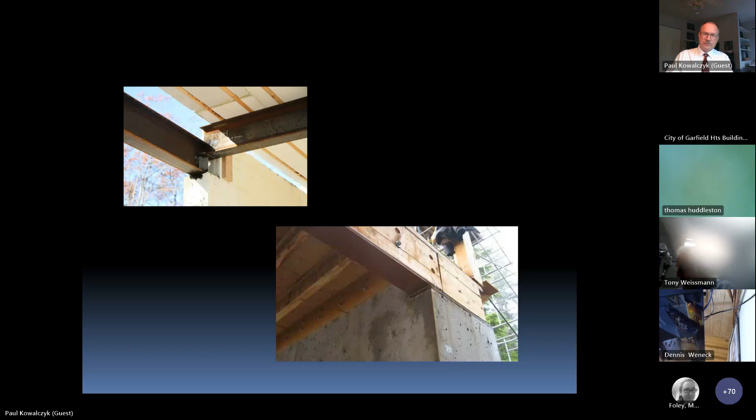What this new code section said is, a lot of times as we're putting up the foundation walls and we start to set the steel beams that are resting on those foundation walls, anytime you run into an open corner where that beam sits in that open beam pocket, starting in 2018, that beam now had to be physically attached to the wall, like we see here.

Now, what actually led to that code change was that there was a house in Ohio under construction, with a beam sitting in an open pocket, and I believe it had a walkout basement. The first floor deck was up. They were starting to put the walls up, but a contractor drove the Bobcat into the walkout basement with his bucket lifted up, and as he was driving through, the bucket caught onto one of the steel beams. Because it was sitting on an outside corner in an open beam pocket and was not secured to the foundation wall, that pulled the whole floor structure down, and all the walls that were starting to be erected fell down as well.

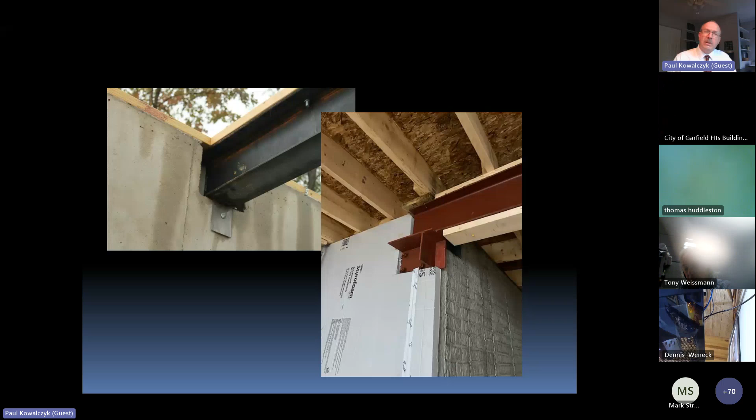And so the whole reason behind this is, as that building is going up, we still want to make sure that it's a safe environment. And that's why this code change came to be. And so when the architect, the structural engineer, and the contractor asked me why this code change was there, I was able to explain to them, this is why we're doing it. It's not just because somebody wanted this code change, but there was really a reason behind why it came into play.

What I've done in this presentation is stayed with a chronological order. This course could never cover all the tragedies and events that have occurred throughout the world.

Let's talk a little bit about the first building code that we know of. It was actually the Code of Hammurabi of 1760 BC. And under this code, there are 282 laws. And of those 282 laws, 6 of those laws related strictly to building construction. And those dealt with consequences of the building failure rather than safe building.

And if you're reading the legal aspects of code enforcement, they do discuss this code as being one of the firsts. And there was some understanding that you, as the builder, had a responsibility if you were building a structure that people went into. And this one specific law stated that if a builder builds a house for somebody and does not construct it properly, and that house which he built falls and kills its owner, then the builder shall be put to death.

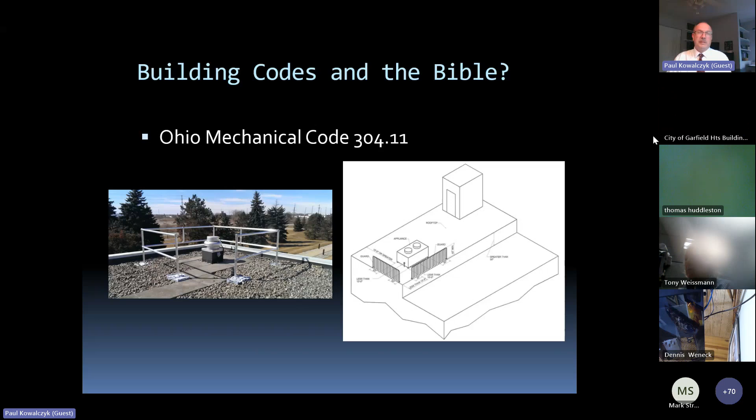The Greek philosopher Socrates, one of his quotes was he had stated that he shall set the joints against each other, fitting, and before inserting the dowels, he shall show the architect all the stones to be fitted, and shall set them true and sound and dowel them with iron dowels, 2 to each stone. And when you read that, that sounds to me like the inspection process. Before we put it all together, before we grout everything, before we close everything up, make sure the architect comes out and looks at everything.

And similar today, in our administrative section of the building code, it is the duty of the owner or the owner's representative to cause the work to remain accessible and exposed for inspection purposes. So going back to Socrates, this section goes all the way back to that. So well before the 3 little pigs understood the meaning of a strong house, there is evidence that the erection of safe structures was an idea going back thousands of years.

So let's look back in history on some of the early tragedies that shaped the need for some building codes. We've already discussed the code of Hammurabi and the Bible, but one of the earliest events that shaped the built city was the Great Fire of Rome. This occurred in July of 64 AD, and over 70% of the city was destroyed. Rome burned for 6 days and 7 nights, and some say that Emperor Nero had actually started this fire as a means for greater urban renewal.

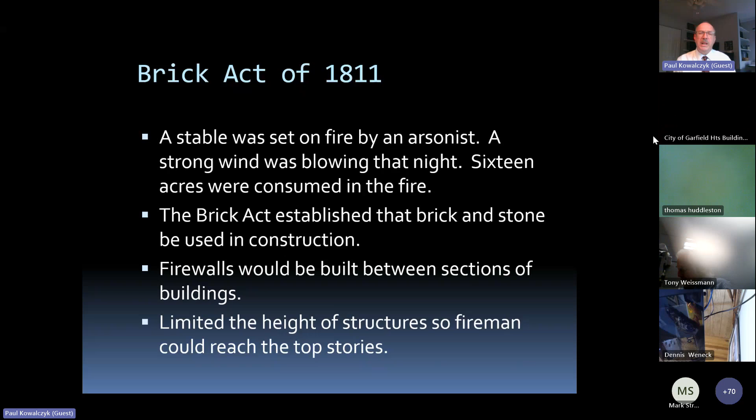The Brick Act established that brick and stone be used in construction. If you were having two houses or two structures built next to one another, you needed to construct a firewall. And they also started limiting the height of structures so that if there was a fire, the firemen would be able to reach the top story of these structures.

Similar to the previous act, in 1814, Portsmouth, New Hampshire also enacted their Brick Act because their city had three major fires in 1802, 1806, and 1813. This Brick Act created a fire zone which would allow wooden structures to be built, but they were limited in size and limited to only being constructed in one story.

There was a lot of outcry when this went into effect because this was a town that was built on the water, and most of the carpenters in this town were shipbuilders. And typically a shipbuilder is somebody who works with wood. And the last thing you want to force a carpenter to do is tell him that he can't build his house out of wood, that he needs to build it out of brick or masonry. And so again, there was much outcry against this act.

In that same year, we had the burning of Washington, D.C., where the British burned down many structures in the city as an attack in the War of 1812. Numerous public buildings were damaged by the fire, including the White House and the Capitol building.

So cities are beginning to realize that there are issues when constructing with wooden structures. As we have these fires, when the communities start to rebuild, we look at widening the streets, putting restrictions on wood. Masonry becomes a means to provide separation between structures. And we really are starting to see cities develop restrictions around buildings constructed with wood.

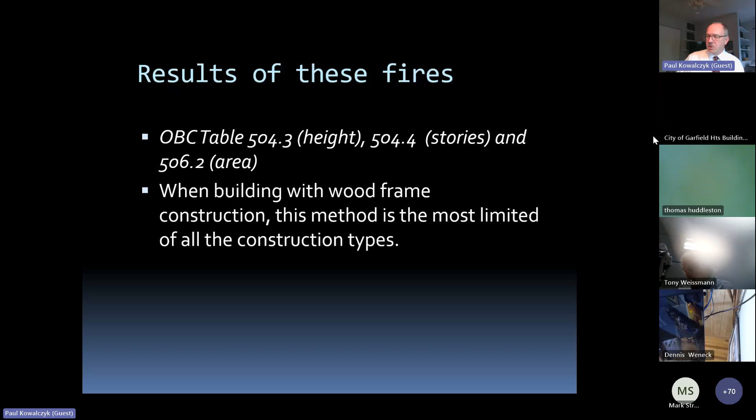So if you jump all the way up to today, what you see as a result of wooden structures is that when you go into our height and area tables, the number of stories, how tall you can build a building, how large you can build a building, you will find out that when building with wood construction, this is the most limited of all the construction types.

And so when you look at these charts, it makes sense that based on our history, when a wood structure is under fire, it will collapse pretty rapidly. And because of that, we don't want to build these buildings too tall or too big or multiple stories.

What is interesting, though, is, as I said earlier, today, on Friday, we went into the new code cycle, the 2024 Ohio Building Code. And we used to have a type 4 construction, which was called our heavy timber. Those were the old buildings that were basically built with brick exterior walls, and all the interiors were heavy wood timber structures. We now have a type 4 A, B, and C construction, because what we're seeing now is what's called a mass timber building.

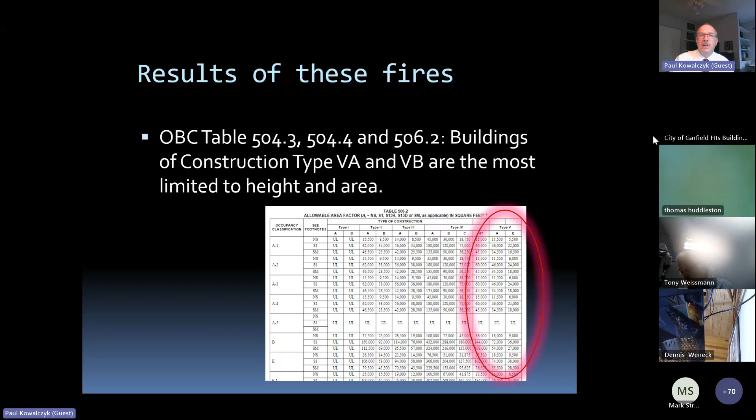And these are structural members made out of pre-engineered wood, and we're putting them together just like we put steel structures. So what we're finding is, although it's a wooden structure, it is pre-engineered and they're much stronger. And so when you build out of those wooden structures, you can actually go quite tall. But again, if we're just stick building a structure, we limit those just because of what we've seen in the past.

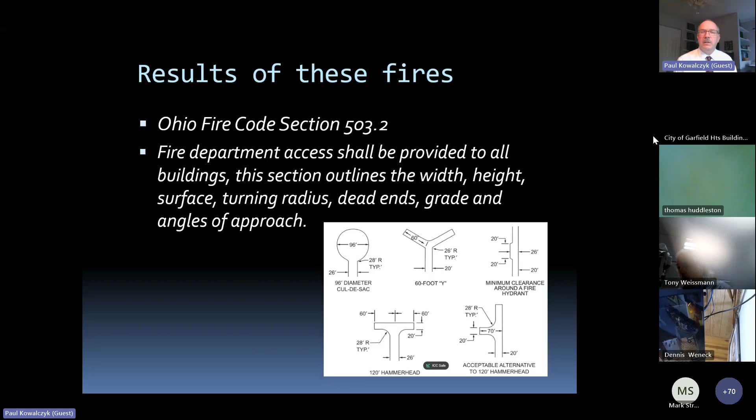Also, as a result of this, if you look in the fire code section, we want to make sure that if a structure does have a fire, that the fire department can readily access these structures. So even in the fire code, we look at roads. If we have a road that comes to a dead end, we have to put means in place that we can get safety vehicles to the end of that road, but we can also get them back out of that road. And so again, we're trying to make provisions so that should there be a fire, we can get vehicles safely there.

Fire separation: there's nothing wrong with building buildings up to a property line, but the closer we get to a property line, we want to make sure that if there's a fire in the building that we've built and it's right on the property line, that fire doesn't hop over that property line and catch another building on fire. And so what we've done is that as we get closer to the property line, we have to really increase the fire resistance rating on that exterior wall.

We also have to begin to look at openings in that exterior wall as we get closer to a property line. In this example right here, maybe that's a 2-story building and it has a roof, but the building next to it is much taller, and those buildings become close to the property line. What we have to think about is if that smaller building catches on fire and that fire penetrates that roof, there's a good chance that that fire could move over to the building next door.

And so we have to start looking at, if we are going to put openings in that building next door, we have to do protected openings, limited in size and where they could be located. So what we are trying to do is minimize any type of risk should there be a fire. And again, this all goes back to all these earlier tragedies that we saw relating to conflagration.

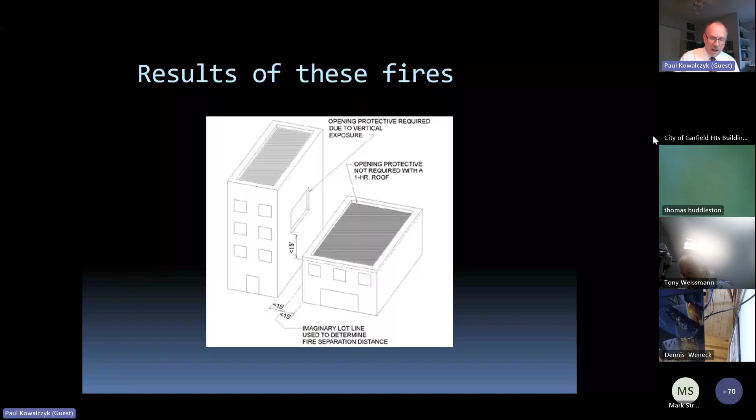Today, if we are putting 2 structures up against one another, fire walls have to be built of any non-combustible material. So in most cases, when we're building buildings, a lot of what we see is masonry being used as a firewall. But in a lot of our townhomes, we do have non-combustible material, and that's basically a shaft wall assembly

that's put between those units. So again, we want to make sure that, yes, you can put buildings up against one another, but we want to protect them so that should there be a fire on one side, the building on the other side can remain.

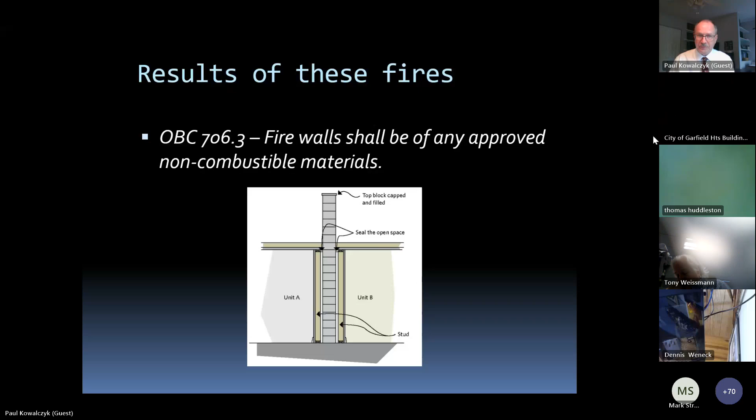Now we're going to shift a little from construction and go into these next examples that will deal with the interior environment of the structures that we live in. And we'll find these in Chapter 12 of the Ohio Building Code and Chapter 3 of the Residential Code of Ohio.

In the late 1800s, many buildings were constructed in New York City to house multiple working class families. We saw a large population of working immigrants coming here to the United States, and we needed to house those. You had a lot of private landowners who were starting to build what's known as tenement housing for these working class folks that were coming into America.

These buildings were known as tenements and are known as some of the worst housing that was ever built in our history. These buildings lacked the basic need for light, ventilation, and sanitation. And I'm sure if you Google it, these pictures, these were structures that people actually lived in. But we really had no regulations up until this time.

So private landowners really maximized what they could build on their properties. And there were really no laws out there that told them how they had to build these structures. And so in 1867, the city of New York came up with the first Tenement Housing Act.

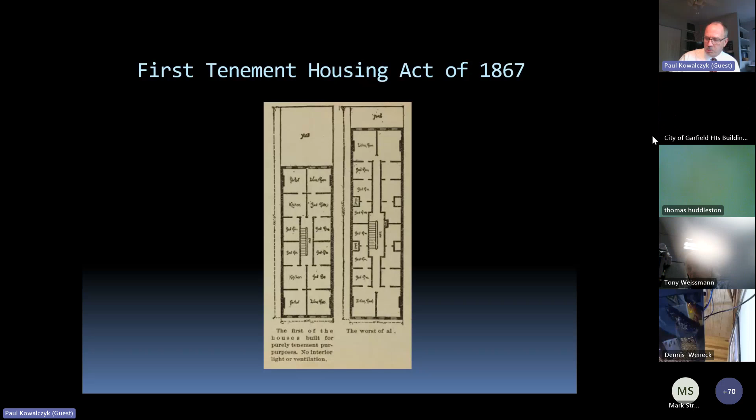So this Tenement Act required that, one, they were going to start installing fire escapes on every building so that should there be a tragedy, there was a way to get out, not just from inside the building. Every single sleeping room had to have a window. Up until this time, there was no requirement to have any railings on the stairwells.

And because we didn't have indoor plumbing, for every 20 people that lived in your structure, you had to provide one outhouse. And again, more pictures. If you look at these pictures, you have your outdoor outhouses for these buildings. And on the inside, there wasn't much ventilation. A lot of these interior rooms were dark because they had no access to natural light.

Well, they went through that first iteration with the first Tenement Housing Act, and they found out that it really wasn't complete enough, because now they just felt that, okay, we're giving buildings the means to have windows. So everyone just kind of pushed their bedrooms to the front and rear of the house, but all interior rooms needed to have windows, and all windows needed to face a source of fresh air and light.

And so what the designers came up with is what we know as the dumbbell design. But it was found shortly after they started building these dumbbell designs that it really only benefited those people who were living on the top floor. And so as you look at this plan, these are two units stacked next to one another. But if you just look at one of the units, the floor plan does look like a dumbbell.

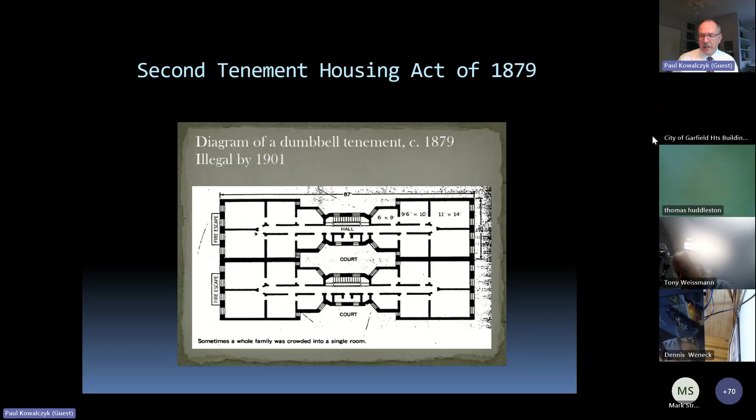But could you imagine looking at this building, the taller you get with that building, those people living on the first couple floors, even though they were facing an interior courtyard, those courtyards were so small that there was really no light getting to any of those units. Maybe the top 2 or 3 floors had some light, and maybe you were getting some circulation.

But what they were also finding out is a lot of these courtyards were used where people were throwing their trash down. So the people on the lower floors ended up just closing off those windows.

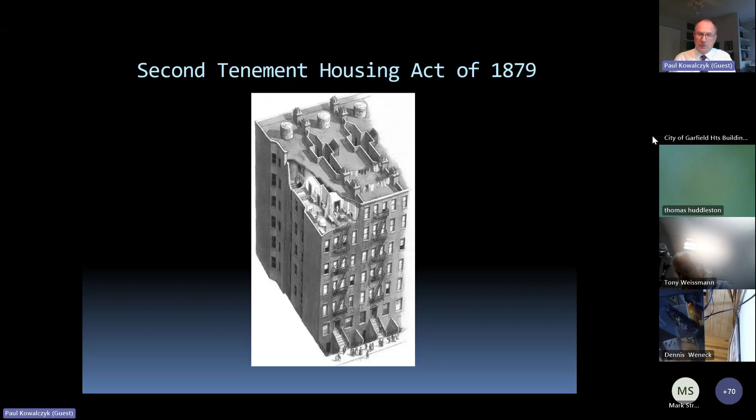And if you look at this picture, actually looking down one of these shafts, you can see that it doesn't take much going down too far until it becomes pretty dark. So really, this dumbbell design really did not work. You weren't really getting the required light or ventilation of fresh air into these rooms.

So in 1901, they actually came out with a new Tenement House Act, and it actually banned the dumbbell design. And now they started looking at floor plans that either resemble the letter H, C, I, or L. Many of these buildings started to be constructed on corner lots so you could take advantage of the two street frontages. And this was just another example of how they really started looking at increasing the interior courtyards and making them much bigger so that you truly could get light and fresh air down to the lower floors.

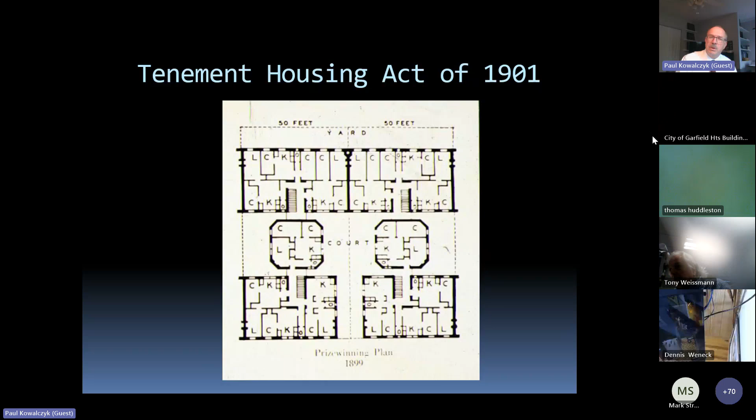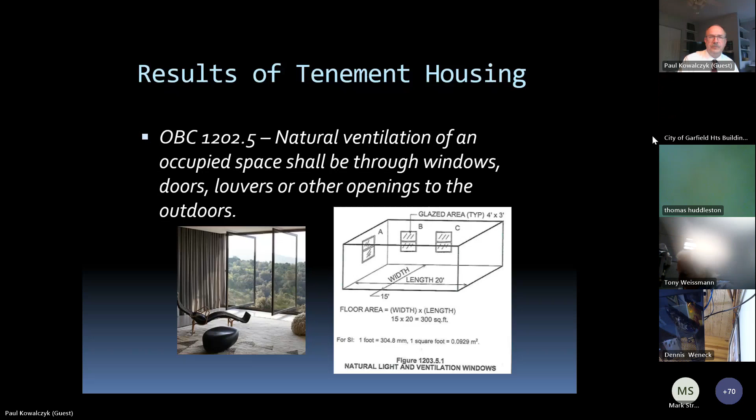So looking at all this, when we go into chapter 12 of the Ohio Building Code and chapter 3 of the Residential Code of Ohio, we can see now that in any type of occupied space in a building, we need to provide a means for natural ventilation through windows, doors, louvers, or other openings to the outdoors. And then every space intended for human occupancy shall be provided with natural light by means of exterior glazed openings. So we have recognized that natural light and ventilation is very important to provide a good interior environment for human habitation.

We talked about those courts between buildings. Early on, those courts were really small, and they recognized over time that those courts had to increase in size. And so in today's code, it actually states that courts shall be not less than 3 feet in width, and courts having windows on opposite sides shall not be less than 6 feet in width. Courts shall not be less than 10 feet in length unless bounded on one end by a public way or yard. And for buildings more than 2 stories above grade, that court shall be increased 1 foot in width and 2 feet in length for each additional story.

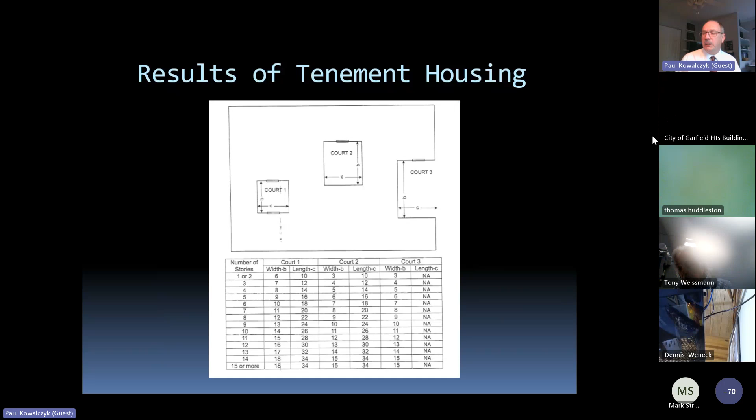So what this code section is saying is that, yes, we can make the building taller, but as that building gets taller, our courts are going to get much bigger and wider so that we can actually get that light and air circulation down to the lower floors.

So the results of a lot of the things that came out of the tenement housing deals with, in chapter 12, we have ventilation of our spaces for occupancy. There needs to be temperature control to provide heat within these buildings. You need to have lighting. We have restrictions about yards and courts. We want to make sure that there's sound transmission control, so we're not carrying heavy sounds between units. That all rooms have minimum space size requirements, and that all our facilities that we live in have toilet and bathroom requirements. And again, this is chapter 12 of the Ohio Building Code, but all these same issues are covered in chapter 3 of the Residential Code of Ohio.

So now we're going to go to the Chicago fire of 1871, which was October of that year. And there were over 300 fatalities. Over 17,000 buildings were destroyed, and this fire covered a 3.5 square mile area. As a result of this fire, over 100,000 people were left homeless, and $200 million in damage, which would be worth $4 billion today.

There always was the legend of Mrs. O'Leary's cow knocking over the lantern and causing this fire. But again, Chicago at this time was a congested city of wooden structures. At this time, we had months without rain, and there was actually a major fire elsewhere in the city the night before. Now, actually, between October 8th and the 10th, there were wildfires raging throughout the upper Midwest region, including Illinois, Wisconsin, Michigan, and these wildfires swept throughout this region.

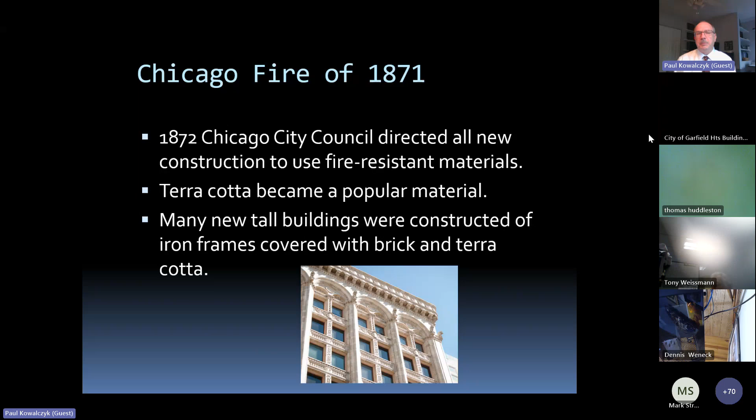And as these buildings were starting to rise into Chicago, as we started to see the early goings of skyscrapers, we started requiring fire hoses to be put into these larger buildings. In 1872, the Chicago City Council directed all new construction to use fire resistance material, and terracotta became a very popular material. As we were building these buildings much taller that were constructed out of iron and steel, in order to protect that under a fire event, we needed to cover those with brick and terracotta.

So what we can relate to in today's code, going back to that time, is if we go in chapter 7 of the Ohio Building Code, based on the structure of that building, we have to make sure that we can protect that structure under a fire event. And so whether it's a wood structure or a steel structure, how can we protect that in a fire situation? In section 905, we talk about standpipes. We have to be able to get that water up to the top of a building. And so certain criteria requires us to have standpipes going up through stairwells.

In chapter 10, the number of exits, we have to make sure there are plenty of exits to get people out of the buildings and have a certain amount of access to doorways. And then also exit travel distance. We can only go so far in order to get to an exit. And we also want to see in the fire code that there is a protection of the water supplies that are coming to these fire hydrants.

So now we're actually going to leave the United States and jump over the pond to England in 1883. And this was actually a stampede. It really wasn't anything that happened with a building. It wasn't a fire or it wasn't a collapse of a structure. But actually 183 children died on this day from compressive asphyxia. And this was an afternoon matinee.

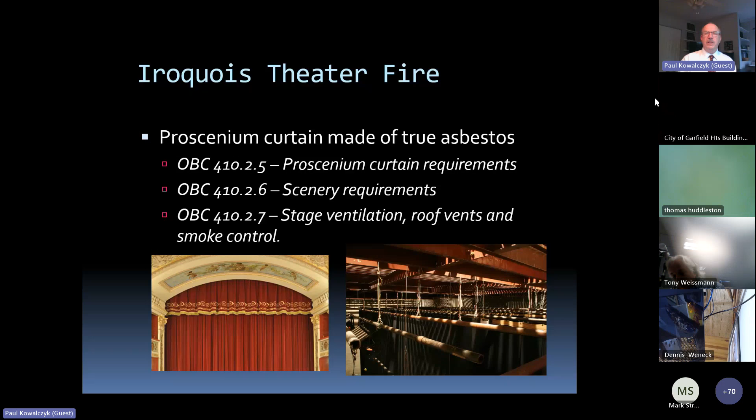During the court process, evidence was shown that building and fire code violations were known by the fire inspectors, but they were paid off with tickets to ignore these violations. Charges were filed on many of the individuals, but the defense attorneys dragged this process out for many years and said the fault was inadequate building and fire ordinances. So in the end, nothing really happened to any of the individuals that were involved in this terrible tragedy.

So now we have the first printed building code in 1905, and this comes into play 2 years after the Iroquois Theater fire. And this was developed by the Fire Underwriters Association. And it is interesting. I would highly recommend, if you're interested in the first building code, to Google this and you can find this. And it is interesting to see that in 1905, many of the similar things that we enforce today, they had the same concepts back then.

But just one section that I wanted to pull out of this was section 161, which talks about seals, badges, and uniforms. And basically it says that the Commissioner of Buildings shall adopt a seal and direct its use in the Department of Buildings. And suitable metal badges of office shall be provided by the Department of Buildings, and each badge shall be numbered for all officials of said department having the right to enter buildings or premises, and to be worn conspicuously by them during their hours of public service. Said badges shall be and remain the property of the building department.

So even back in 1905, we talked about, when we go out in the field, we should always be carrying proper certification that shows us that we are part of the authority having jurisdiction. And if you look in the administrative section in Chapter 1 of the Ohio Building Code, it states that the building official or the building official's designee is authorized to enter the structure or the premises at reasonable times to inspect or perform the duties imposed by this code. So that first section pretty much mirrors what was said back then.

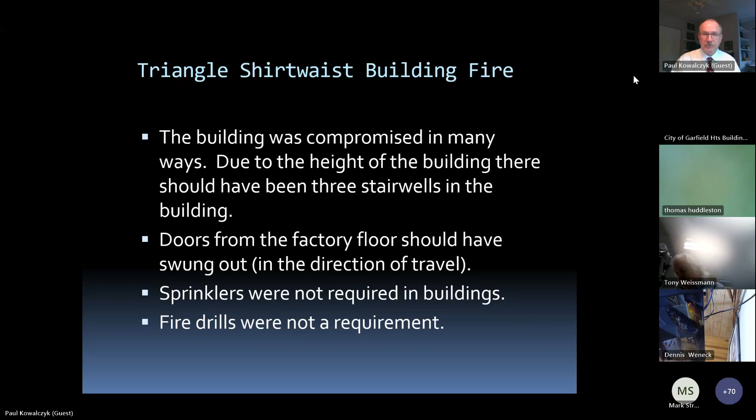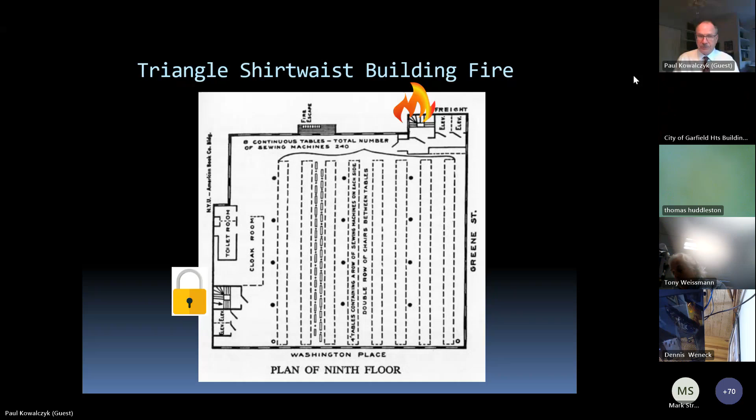On each of these factory floors, we had long tables, tight spaces, and a lot of machinery. The fire started at the end of the workday by a match or a cigarette that was thrown into a scrap bin under one of the sewing tables. As that fire grew, it jumped up onto the top of one of the cutting tables. And they had cloth patterns that hung down from the ceiling. So as that fire went from the rag bin to the top of the table, it immediately caught a lot of these cloth patterns hanging down from the ceiling.

So that made the fire jump automatically to the underside of the floor ceiling assembly. Once that fire consumed the entire 8th floor, it quickly moved to the 9th floor and on to the 10th floor. And as I said earlier, it was common practice in this time for the factory managers to lock the exit doors. This was to prevent theft from the building. At the end of a shift, managers would unlock the doors and monitor the workers as they were leaving for that day.

When the fire was actually seen on the 8th floor, there was a working telephone, but it only had access to a telephone on the 10th floor. There was no telephone line on the 9th floor. The first time the occupants on the 9th floor actually saw the fire was when it was actually on their level.

There were two stairwells in the building, but one was locked, and the floor manager scurried to try to get that open, but that one quickly caught on fire. The only other means out of this floor was the fire escape. Some people had made it up the stairs and were able to get out via the elevator until the heat or the fire actually damaged the cable in that elevator shaft, and it put that elevator out of commission.

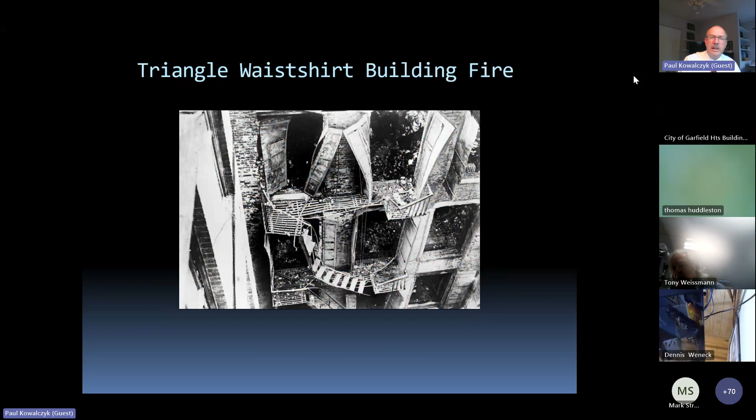Actually, the only other means out now was out onto that fire escape at the back of the building. But again, this fire escape is made of iron, and what happens to iron when it heats up from the heat from a fire? It begins to deform. So as that was beginning to deform, the weight of all the individuals on that fire escape actually collapsed the entire fire escape, and everybody that tried to use that as an exit was killed going that way.

Up until this time of the fire, ladders only reached the 7th floor. As I said, the fire started on the 8th floor and moved up to the 10th floor. So the only fire department access was either up through the building or up to the 7th floor with the ladders. Over 62 people fell or jumped from that building on that day, and each one of them died. A few tried jumping into the fire safety life nets that the fire department had, but all of those life nets broke under the force from somebody jumping from that height.

They did have a fire hose on the floor, but the fire hose was rotted, and had it not been rotted, it still wouldn't have worked because the valve on that fire hose was actually rusted shut. So in the aftermath of this fire, many reforms were made for automatic sprinklers, fire drills, worker safety and workplace environment, fire escapes, and occupant limits.

So if we look in today's code, in any type of F-1 factory building, you are required to have automatic fire sprinklers. In Group F occupancies under the Ohio Fire Code, you are required to have fire safety and evacuation plans in place. Worker safety is now mandated by OSHA and the labor unions. Fire escapes still exist today.

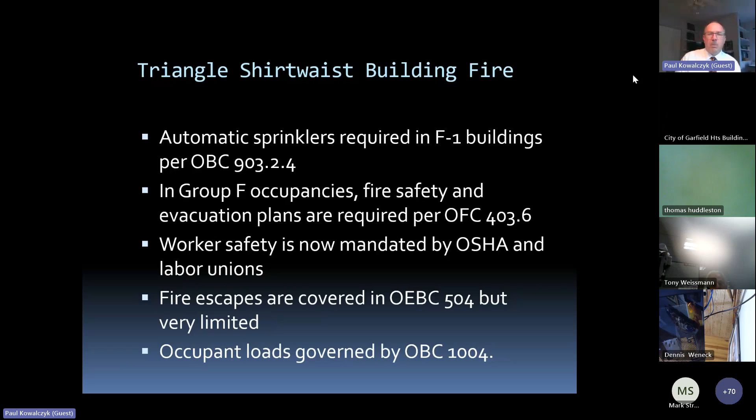You aren't permitted to build new fire escapes, but if they are existing, you do have to maintain those. And if you make any modifications to them, they are very limited, but we would find those in today's Ohio Existing Building Code, Chapter 504. And then once again, occupant loads are covered by Chapter 10 of the Ohio Building Code.

This was a very interesting book to read. There are also other books on this fire, but if you want more on this subject, this was a great book to pick up.

After this fire occurred, in 1913 the NFPA appoints a Committee on Safety to Life. And this committee created the following standards. There was a standard that was created in 1912, 1 year before this committee went into effect, but they went back and pulled that standard back and wanted to look at it. And that discussed exit drills in factories, schools, department stores, and theaters.

In 1916, this committee put together requirements on outside stairs for fire exits. And in 1918, they started putting together safeguarding factory workers from fire. And the result of this committee in 1913, through these three standards, really began to lay the groundwork for NFPA 101, which today is the Code for Safety to Life from Fire in Buildings and Structures.

Let's now talk about the Coconut Grove fire. So again, this was that first book that many years ago I picked up and read and kind of intrigued me on these subjects of building tragedies. And this happened in November of 1942. 492 people died that night and 130 were injured.

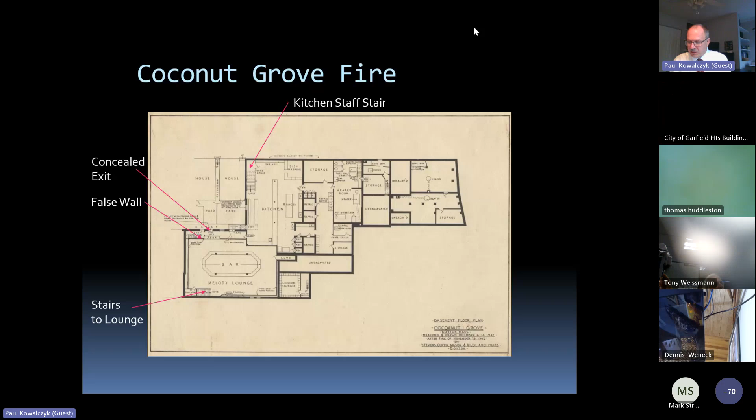From the basement area of the Melody Lounge, there was only one obvious exit out. So if you were a patron to this space, you would enter from the stairs off the main lobby and come down into the lounge. Once you got into that lounge area, there was no other means to get out of that basement. The remainder of the basement was back of house, kitchen, and storage areas, and there was another exit door leading to the outside alley, but it was concealed behind this false wall, so if you were a patron, you wouldn't know it was there. And then there was a stairway in the kitchen that led up to an exit, but that was only known by staff members.

The capacity of the nightclub was around 600 people. On the night of the fire, it was estimated that there were 1,000 people in the club. So again, just like we saw in the Iroquois Theater fire, we had an occupant load that was far exceeded, and it really was the building owner's responsibility to make sure that that occupant load was not exceeded. Again, here we have 400 more people than should have been in that building on that night.

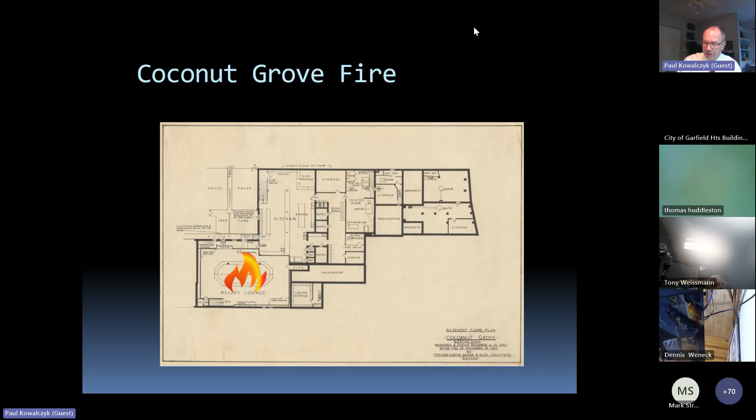And so that fire started in the Melody Lounge in the basement. A busboy was holding a match while replacing a light bulb in one of the fake palm trees. So the fire starts in the Melody Lounge and it immediately spreads through the combustible finishes on that ceiling. As soon as that ceiling catches fire, that fire starts up the stairs and immediately takes over the lounge on the grade level. Once it reaches that grade level, because of all the artificial palm trees, because of all the finishes in that building, it quickly moves to the main dining room floor and eventually onto the cocktail lounge.

Being that the entire club throughout was filled with combustible finishes, this fire spread so rapidly. Down in the basement in the Melody Lounge, many died trying to use the only stairs the patrons knew. Some employees in the basement were able to guide some through the kitchen exit doors, and some actually survived by going into a large refrigerator in the kitchen. Approximately 100 people died at the main entrance at the Broadway Lounge, and there were some 200 people that were trapped behind the revolving door at the Piedmont Street entrance. The revolving door jammed, and that blocked people from getting out of that exit.

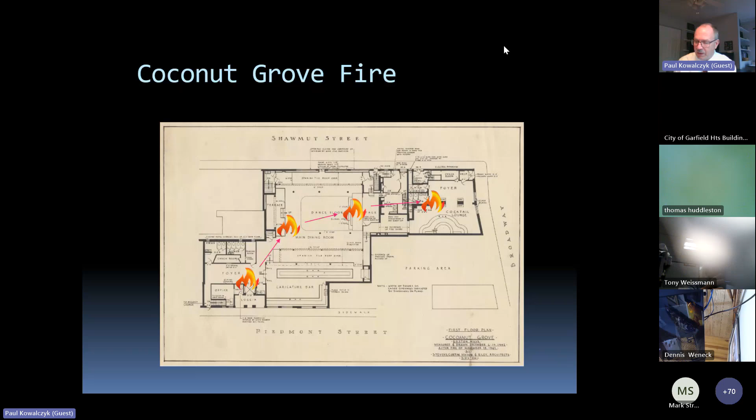In today's code, we have a requirement that if you have a revolving door, you are required within 10 feet of either side of that revolving door to put an exit door in, so that if there is an emergency and people should be stuck in trying to get out the revolving door, you actually do have a door that has panic hardware in it, and so you don't have to use the revolving door to get out.

If we go to chapter 8 of the building code, depending on what type of space you have, if it's an exit enclosure or exit passageway, you can only put certain types of materials on the interior wall and ceiling finishes. If it's a corridor, again, only certain types of materials are allowed to go in there, and certain enclosed rooms and spaces. So we have begun to recognize that you just can't go in and start putting anything up on walls and ceilings, because in a fire event, things will burn, and we want to make sure that these materials have certain smoke and fire ratings.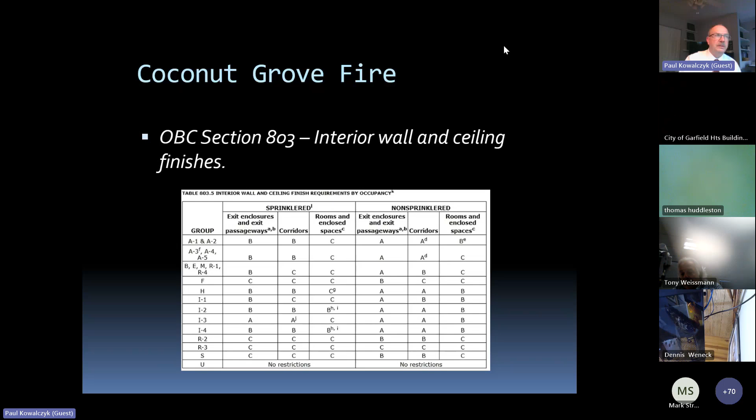Every room or space that is an assembly occupancy shall have the occupant load of the room or space posted in a conspicuous place near the main exit or exit access doorway from the room or space. But again, there are a lot of occupancy spaces that people are compliant with putting these signs up. But again, it does come down to the owner of the building to make sure that they are complying with their occupant load.

Exit measurements. If we truly do have a space that only has one way out, we really do limit the amount of occupants that can be in that space. And we also limit the exit travel distance to get out of that space.

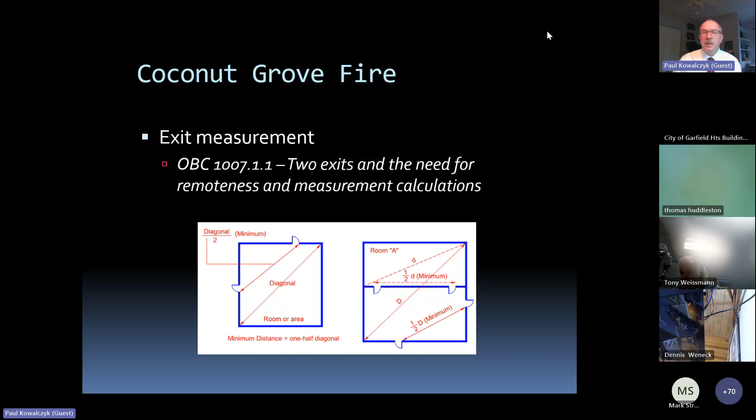And then again, many spaces require two means of egress. And so what we want to make sure is that egress doors have remoteness, that they're not next to one another. You don't want to just provide two doors and put them next to one another, because if there is an event at one of the doors, you want to make sure that you have a door spaced far enough apart that the occupants can actually use that door if the first one is not able to be used. And so we have calculations to determine, based on that room or space, how far apart those doors have to be.

And then egress doors shall be readily openable from the egress side without the use of a key or special knowledge. So again, under a panic situation, you need to just be able to know where that exit door is and run towards it and not have to think what you have to do. If you are panicked and this is properly installed, you will just lean up against that door and it will get you out of that space.

That building does not exist today. All there is is a commemorative plaque for that tragedy in one of the sidewalks. And again, if you're interested in this tragedy, Fire in the Grove is an excellent book to read. And again, it was the first book that I read that got me on this interest in building tragedies.

So now what we're going to do is we're going to go to the Hartford Circus Fire in July of 1944. And again, this is not a building at all. It's actually a circus tent. But in Chapter 31 of the Ohio Building Code, we do regulate special construction. And under that Chapter 31 of special construction, we do have a place that talks about tents and membrane type structures.

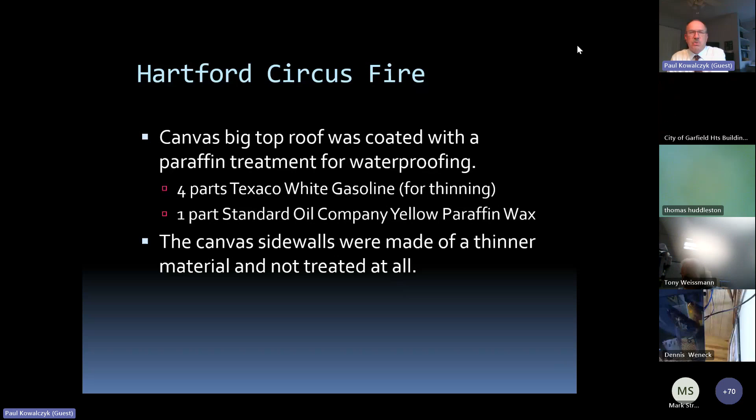The fire on this day actually started in an external men's toilet facility adjacent to the main tent. The bathroom facility had canvas sidewalls, but no top. The theory is that somebody was using that toilet facility during the performance and discarded a cigarette on the ground. And you can imagine what the grounds look like around the circus tent. Also in this area, the toilet room waste paper, sawdust, wood chips, and dry grass were all on the ground.

So as the performance was going on inside the big top, that's where all the attention was being paid to, what was happening within the 3 rings. As the fire began to grow in the adjacent toilet room, it quickly spread to the canvas sidewalls of the main tent. The sidewalls, which were a much lighter material, quickly caught fire, and the flame moved quickly to the tent roof.

The circus did employ seatmen that were stationed underneath the bleachers, and they were there in case there was an emergency. But once the roof caught fire, due to that paraffin wax coating, which was heavily diluted with gasoline, it took no time for that fire to spread rapidly across the big top. Within 10 minutes, the support posts and the ropes were burned, and the big top was beginning to collapse.

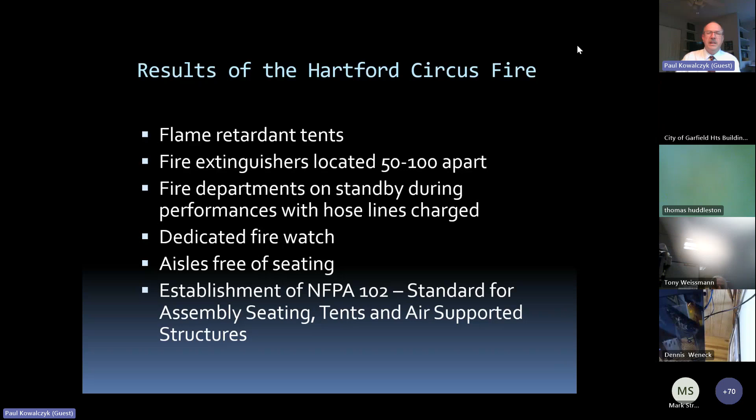Today, we require all tents to be fire retardant treated tents. Fire extinguishers have to be located between 50 and 100 feet apart, and fire departments have to be on standby during performances with their lines charged. There also needs to be a dedicated fire watch. Nobody should be standing in the aisles. And because of this, it was the establishment of NFPA 102, which is the standard for assembly seating, tents and air supported structures.

Even today, when we have tent structures that come into our jurisdiction, if you look in the Ohio Fire Code and the building code, once tents reach a certain limit, you have to actually give them a plan approval. And part of that plan approval is they have to provide you a certificate of flame resistance that shows you that that membrane structure meets the requirements for that material. And that certificate will actually be on the material or fabric when you go out and do that inspection.

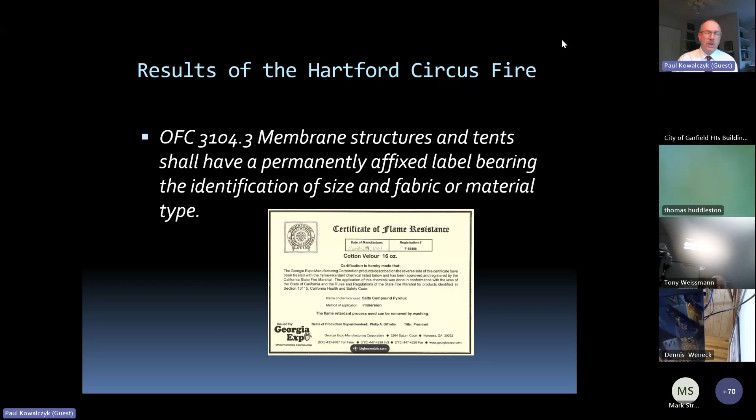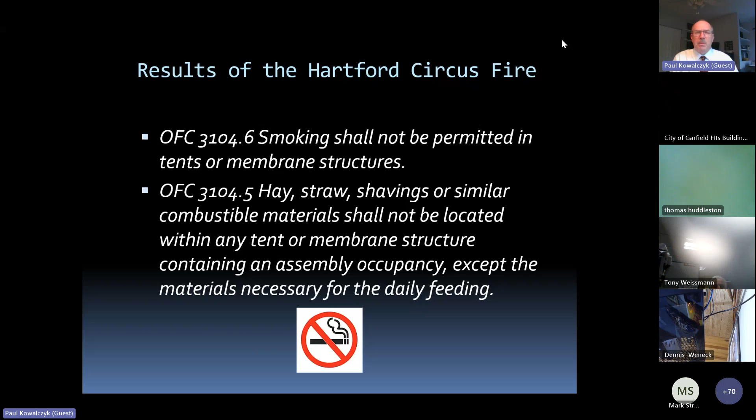In the Ohio Fire Code, it says that smoking shall not be permitted in any types of tent or membrane structures. And hay, straw, shavings, or similar combustible materials shall not be located within any tent or membrane structure except the materials needed for the daily feeding of those animals. Portable fire extinguishers shall be provided, and fire hose lines, water supplies, and auxiliary fire equipment shall be maintained at the site in such numbers and size as required by the fire code official.

And again, when we deal with tents, this is only a small fraction of code requirements for tents and membrane structures. When you go into the specifics, we have seating capacity per person, lighting that is used within these tents, clearly defined exits, and there is a fire watch. And as I said earlier, NFPA 102 that we have today was a strict result of the Hartford circus fire.

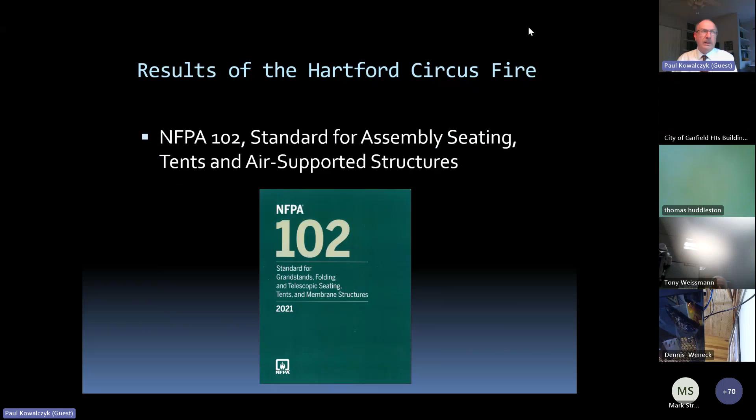Again, there are a couple books written on this tragedy. It was really interesting to read because, again, this was not a building structure, but it was actually a tent structure. But we saw things that were not enforced or working within the code that caused people to lose their lives.

Now we're going to move to Atlanta, Georgia in December of 1946, which was the Winecoff Hotel fire where 119 people died and 65 were injured. This hotel opened in 1913 and was one of the largest buildings at the time in Atlanta. This building was located on the corner of Peachtree Street and Ellis Street.

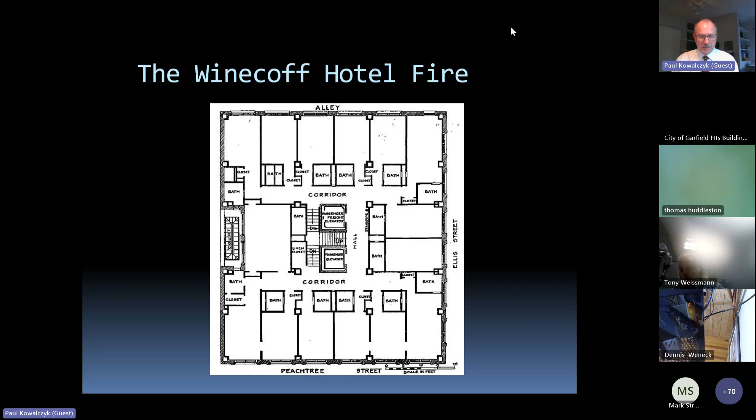There was a code amendment in 1924 that required fire doors and stairwells, but again, that was well after this hotel was built. To this day, the cause of the fire is unknown, but they do believe it was either arson or did somebody leave a mattress in a corridor on the third floor, and did that catch on fire from a discarded cigarette? So sometime around 3:30 a.m. in the morning, this fire starts on the third floor, and it quickly rose to the fifth floor.

Many guests opened their doors due to the commotion they were hearing, and as soon as they saw the fire and smoke, they ventured back into their rooms and opened their windows. Since the doors into the hotel rooms had transoms above them, it did not take long for the smoke and the fire to get sucked into the individual hotel rooms.

As the fire is burning on the lower floors, hot gases are rising up the open stairwell, so we have the chimney effect. Since the top of the stairwell above the 15th floor is not vented, the hot gases build up to the underside of the building, and then they start to extend down the stairwell. And when they meet in the middle of the building and they hit the fire, they explode into flashover. This fire spreads from the third floor all the way up to the 14th floor. It did not make it up to the top two floors.

With the elevators not operational and the stairwells impassable, the only way out of this building was out the windows. Some were luckily able to escape onto the roof of the adjacent building. There were a lot of hotel rooms on the west side of the building, and there was the Mortgage Guarantee Building that was only 10 feet away. People in that building actually started opening their windows and passing ladders across the 10-foot alleyway to let people escape that way.